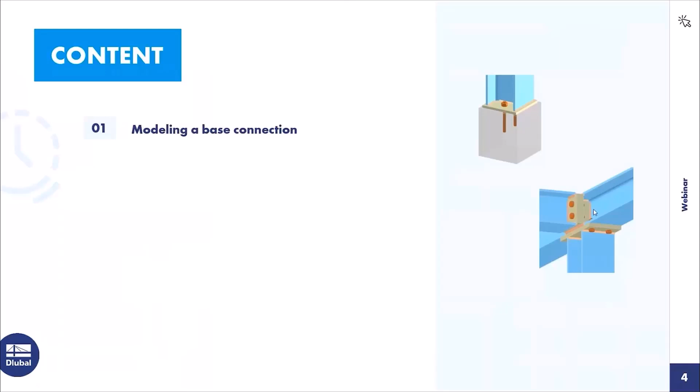For the agenda today, I will model different connections. I start with a base connection, then rigid and pinned connections. Then follows the connection design, and we do a stiffness analysis. The fourth point is result evaluation and documentation, and the fifth point is prospect.

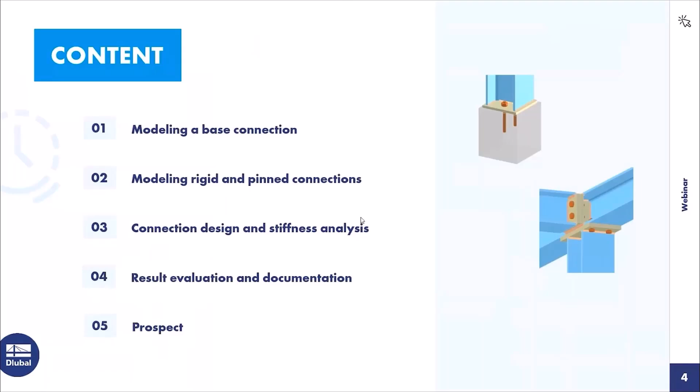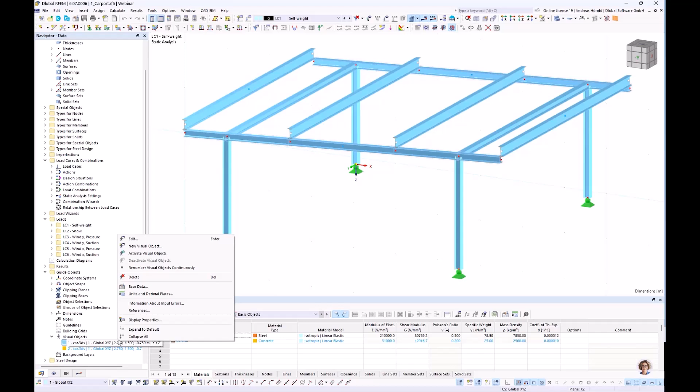Okay, that's the model for today: a larger carport. The dimensions are 6 meters by 7.5 meters. I'll display two guide objects - just a moment - visual objects, I activate them. Two cars so you can estimate the dimensions of the carport. That's the reason why it's made of steel. It's a little bit larger than a normal carport.

Okay, I deactivate the guide objects. So we have different load cases: self-weight load case, snow, wind in all directions. Then there are different load combinations, ultimate limit state, and serviceability limit state design. Also load combinations for the design of lifting up.

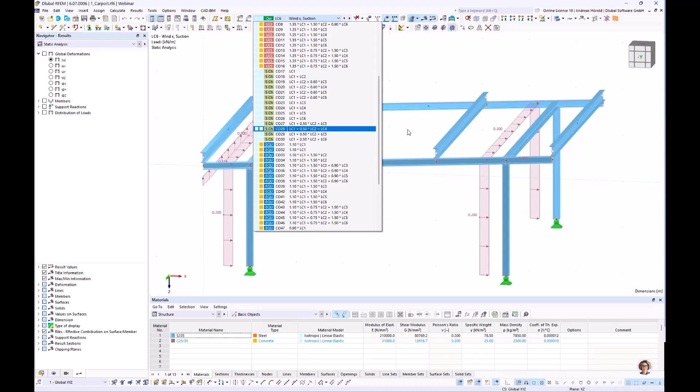So then I did a steel design. Design ratios by members - all designs are fulfilled, with larger and higher design ratios.

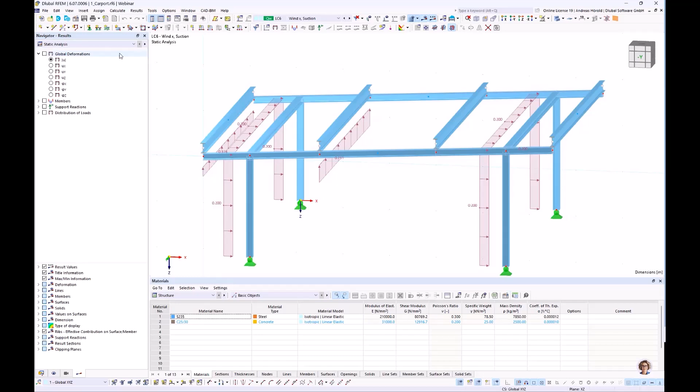Then we activate the steel joints add-on in the base data add-ons. Steel design is already activated, and we activate steel joints so that we can design all the joints of the structure. For standards, we use the Eurocode and the German National Annex for all the load cases, classification, and combination wizards for the steel design and also for steel joints.

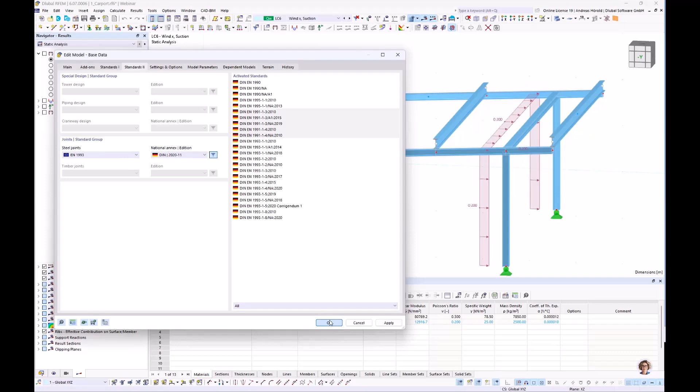So then we start with the first joint. I right click on that node and choose create steel joints. It's only one member. The type is end - now that's clear.

Maybe we turn back to main. Let's check the ultimate configuration - that's default. You can perform a buckling analysis if you have larger plates, such as webs or so. That's quite important. The design check for the plates - the limit plastic strain is 5%, also for the welds. You can change that, but I'll leave it because that's the value from the Eurocode standard. Okay, I'll leave all the other settings.

Then we turn to components, and I can press insert component at beginning or at end - that doesn't matter. But I select this component: base plate. Now we have different modifications: stiffening elements, connection elements, and others, including fasteners. You can move the mouse over the image and see as a tooltip what connection or stiffening element is available. So I select base plate.

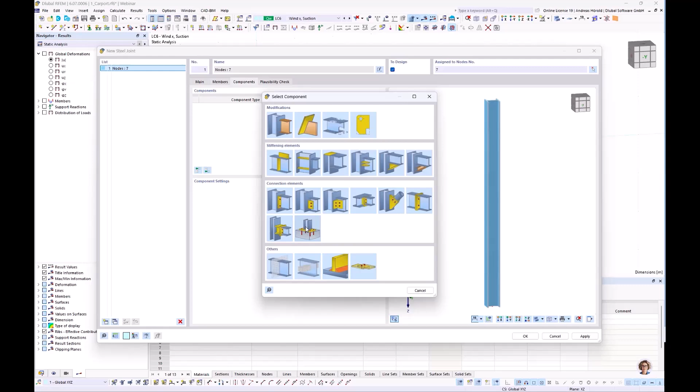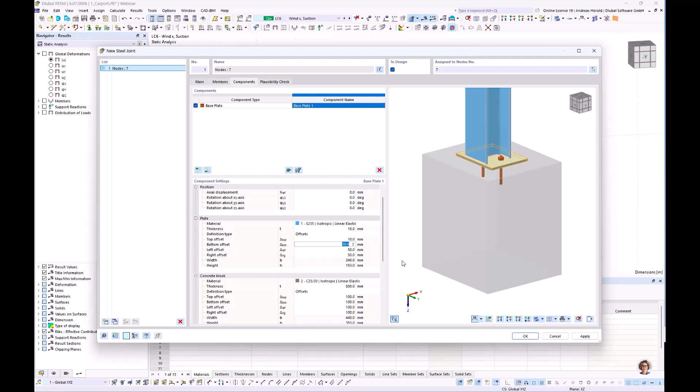That looks already quite good. That's a concrete block - we decrease it a little bit. Let me enter some values. The thickness of the plate should be 10 millimeters. Top offset in all directions is 10 millimeters. To overtake the previous value, you can press F8. F8, F8, F8 - then we have the value on all sides.

So then the thickness of the concrete block should be 200 millimeters, and I define the offset again - also a very small offset of 10 millimeters. I overtake it again with F8.

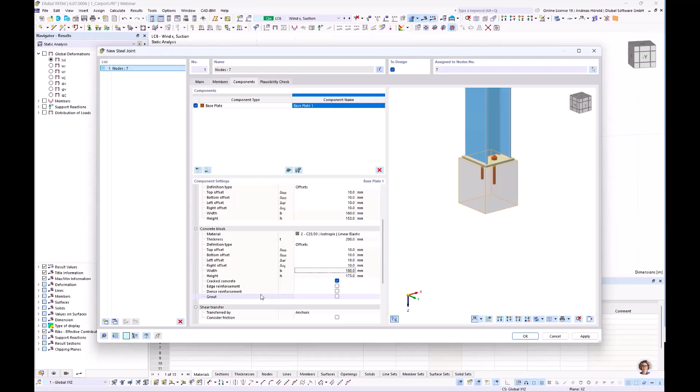So then you can consider cracked concrete - yeah, we do that. You can also consider edge reinforcement, dense reinforcement, grout. You can display that grout - no, we don't use a grout. Then you can consider the shear transfer by anchors, and you can also consider friction if you want.

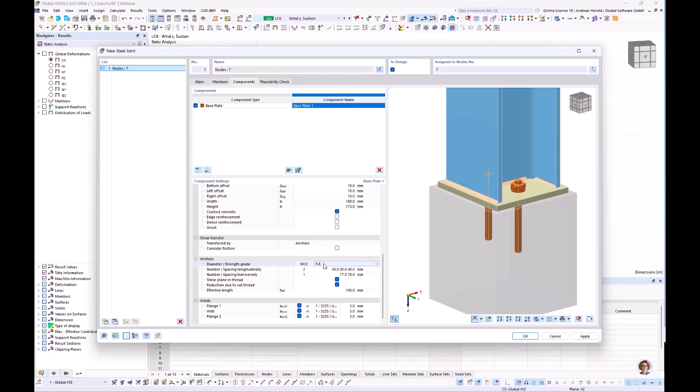So then we turn to the anchors. M12 is okay in our case, and we choose 4.6 for the strength grade. These dimensions are okay, this distances. Then we change that value so it's exactly in the middle. The shear plane shouldn't be in thread, and we consider the reduction due to cut thread. So the height or length of the anchors should be 100 millimeters. That's okay, and the welds are also okay.

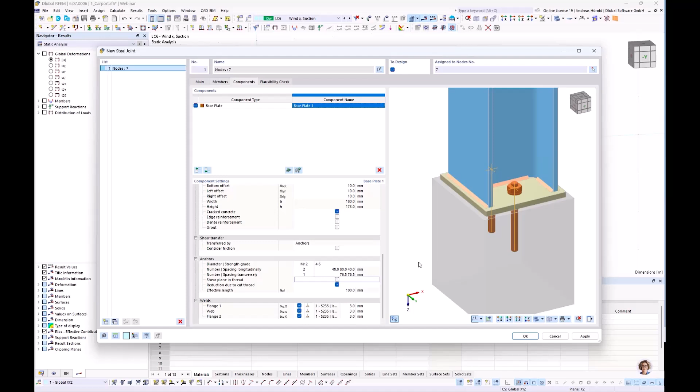Yeah, that was very quick - that's all for this joint. We do the plausibility check - that's okay. We take a look at the model. Now you can see the joint, or the column base joint, here.

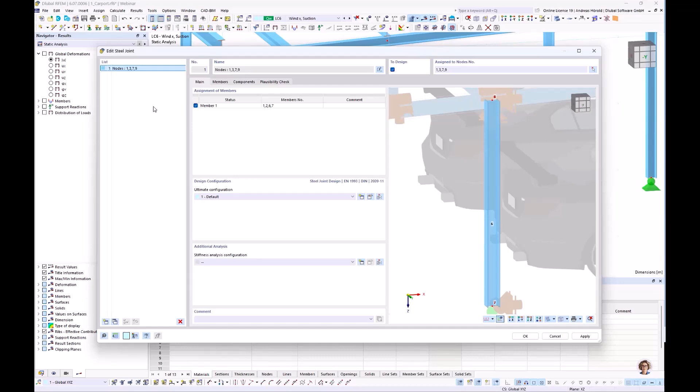You can disable it when you press no joint model, or you can display the simplified joint model right above here. But we would like to display the detailed joint model. So I double click on the steel joint again, and I assign also the other nodes right above - this one, this one, and this one. Now all 4 nodes are selected.

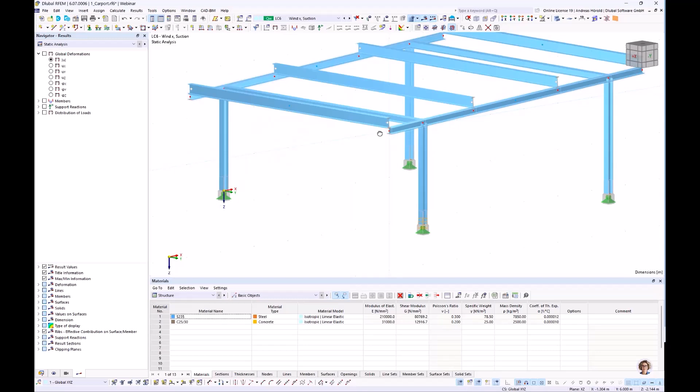So the next joint is the frame corner. We can see in the model the steel model is stiffened in all directions by frame corners - in this direction, also in this direction. There are no bracings. And we would like to define the connections on the frame corner.

So I show you another way to do that. You can see in the navigator data the types for steel joints. One steel joint is already there, and I can do a right click and press new steel joint. But now I have to assign the node.

For members, those 4 members are connected in that node, and we would like to do a stiffness analysis for the frame corner. That's why I select initial stiffness, no interaction.

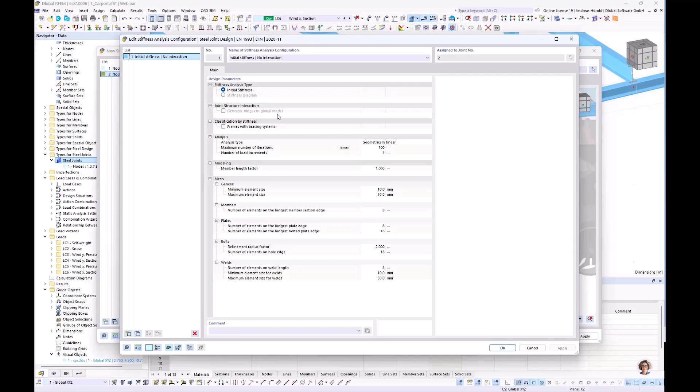Let me go to the settings. Initial stiffness is selected. For the future, there will be another stiffness analysis type available, the stiffness diagram. That's for larger connections with high loadings, where you can consider the plastic behavior. Then in the future you can select generate hinges in global model - that's not yet available, that's why we do that by hand later. Okay, that's all.

So we turn to members. At least one member should be supported. Let's end it - this one is continuous, and automatically member 3 is also continuous selected. So for the column, we would like to do a stiffness analysis.

The program should calculate the stiffness of the joint around Y and around Z - meaning M,Y and M,Z. And for this horizontal beam, there should be also a stiffness analysis M,Y.

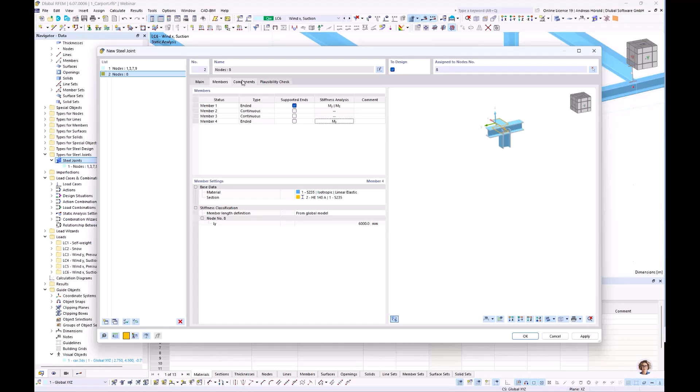So then we turn to components. We insert a component, and this time an end plate. You can move over it - end plate in the middle. So the connected member 1 should be the column. You can see it's selected in the right window with the yellow selection.

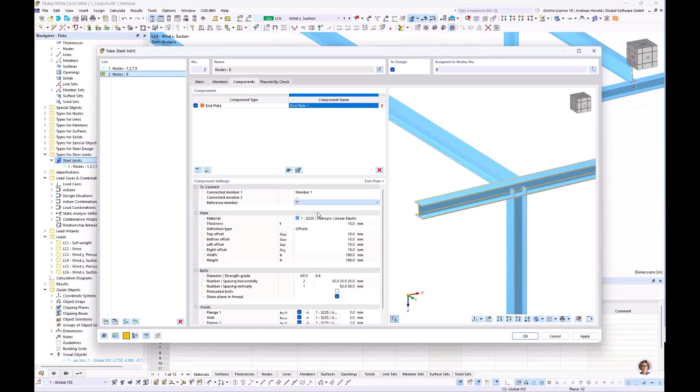And the reference member should be member 2 and member 3. Okay, so you can already see a connection. Now we have to modify it with the next steps.

So the thickness of the plate should be 15 millimeters, the offset in this direction should be 60 millimeters, also in the other direction. And in this direction, there should be no offset.

You can see the changes in the window at any time. So M12 is okay, but we choose 10.9 as strength grade. So that's okay, all those distances, but we select also for the spacing vertically 2, and I select these values, and that looks quite good.

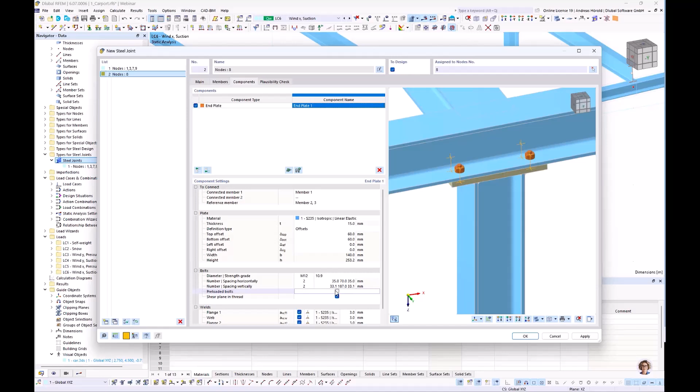We use preloaded bolts for this connection, and the shear plane shouldn't be in thread. And I changed the welds for the flanges to 4. Now you can see at any time what parameter should be defined.

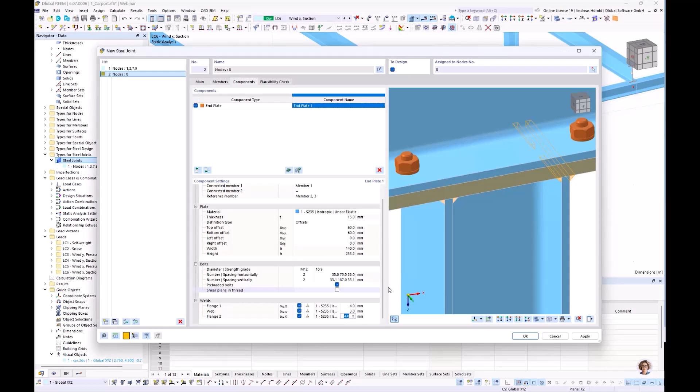So that's all for the connection of the column to the horizontal beam. And now we would like to connect this horizontal beam with this horizontal beam.

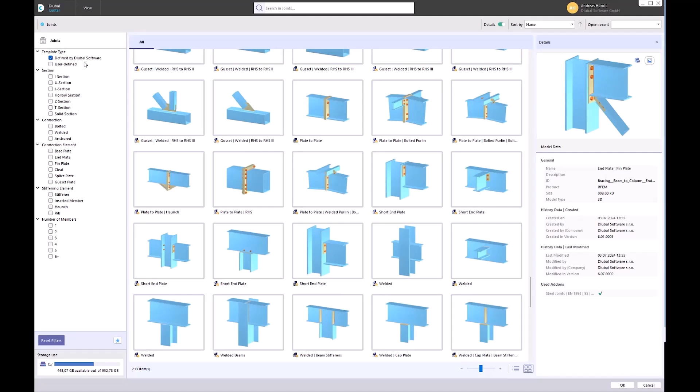That's why we insert a component from the library. So I select that, and what's quite new - the library is in the Dlubal Center. Now you can see different template types, also user-defined from me. So I select only the defined connections or joints by Dlubal Software. We've got the I section.

The connection is bolted, and there are 3 members in the connection. So we would like to select end plate to plate. That looks quite good.

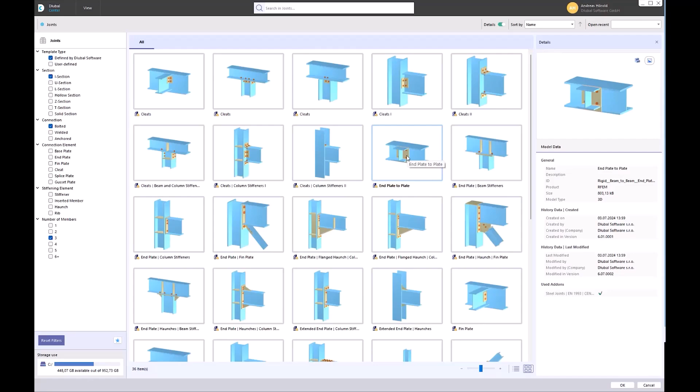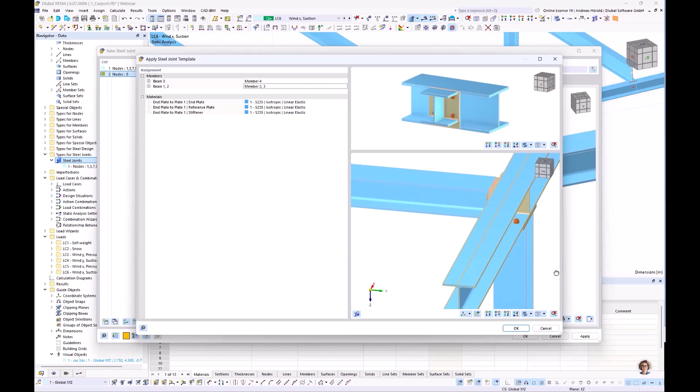So I double click on it. We should see a preview in some seconds. But at first we have to select the member that should be connected - member number 4, this horizontal beam, to member 2 or to members 2 and 3. The preview looks quite good, and we can overtake it with OK.

So let me change the values - also a thickness of 15 millimeters. No, we have to select that line. Thickness of 15 millimeters, okay. Minus 7.5 is okay, so that we can consider a weld here.

Okay, all the values for end plate 1 is okay, but we have to modify the reference plate - 15 millimeters. The top offset and bottom offset is okay, but now I decrease the width so that we have the same dimension as the end plate. So it should be stiffened.

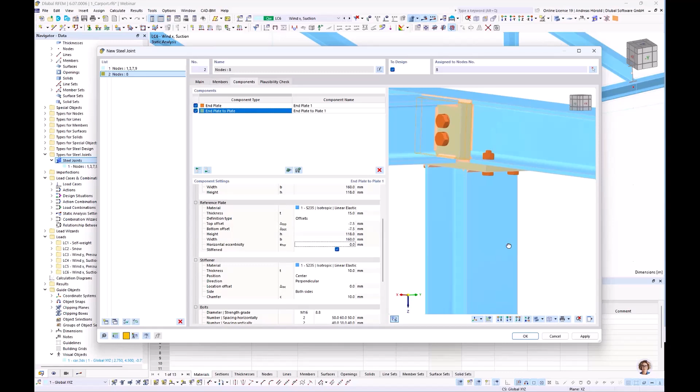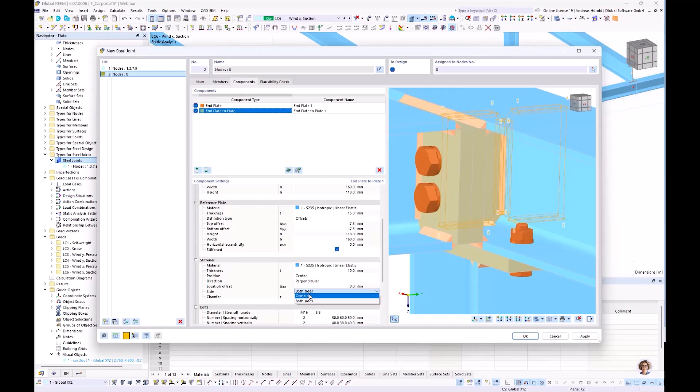Okay, but not on this side, because we would like to define two stiffeners here in the back, but we can't do that because the connection would be closed. So center is okay, but not both sides, only one side. So now this stiffener has disappeared.

Then the diameter should be M12, 10.9 as strength grade. So let me change the spacings.

Preloaded bolts, and the shear plane shouldn't be in thread.

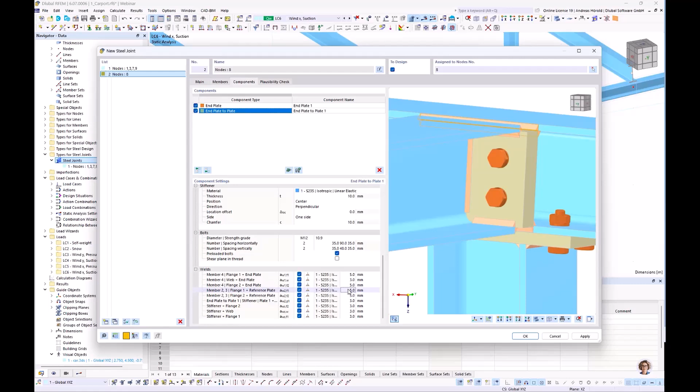The welds are okay, 5 millimeters for the flanges and 3 millimeters for the webs.

So then we have to add the stiffener here. I insert a component at the end. You can see the stiffener here. The stiffened member should be this one, the horizontal beam, and the reference member should be the column.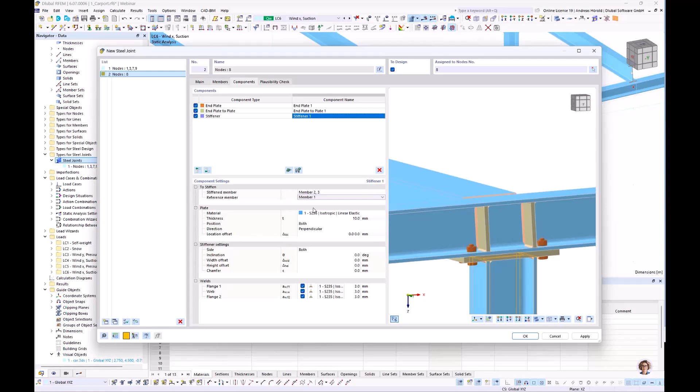So then position is okay. And you can say perpendicular or parallel. Sorry, that was a wrong click. So that looks quite good.

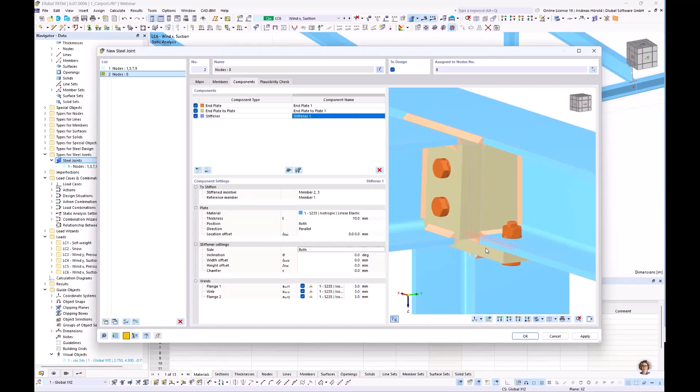But it shouldn't be on both sides. You can see that would be closed here. That's why we select the right side. Then we have only the stiffener on this side.

Okay, so the welds for the stiffener are okay, 3 millimeters. Plausibility check is okay.

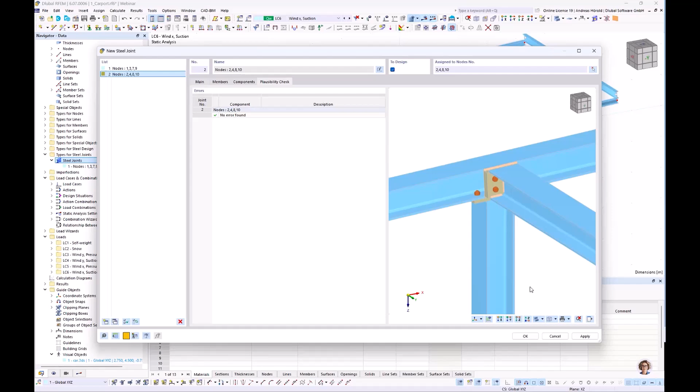I can select also the other frame corners. Plausibility check is okay. And we can display all in the model. Okay, that looks quite good.

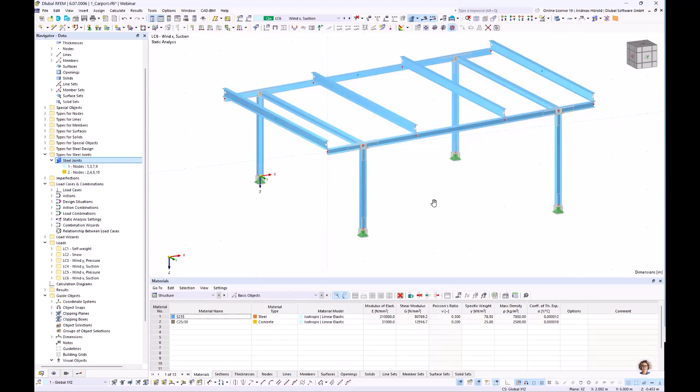Then we add joints for the purlins. I do a right click, create steel joint.

So then members are, those are the 3 members. This one is supported and also continuous. And member 3 is also continuous.

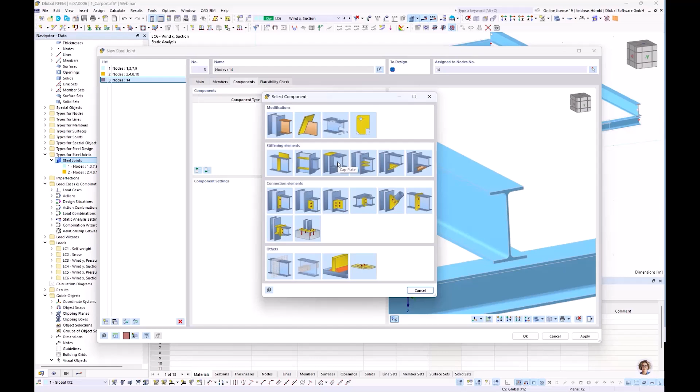So then component. At first we enter a cap plate at the end. Not that we create a gable support, so yeah, beginning or end, that doesn't matter. And you can see the cap plate and the second line in the middle.

So this member is member 2, that's okay. 10 millimeters is also okay, but I define a top and bottom offset of -5 millimeters, so that we can weld that here.

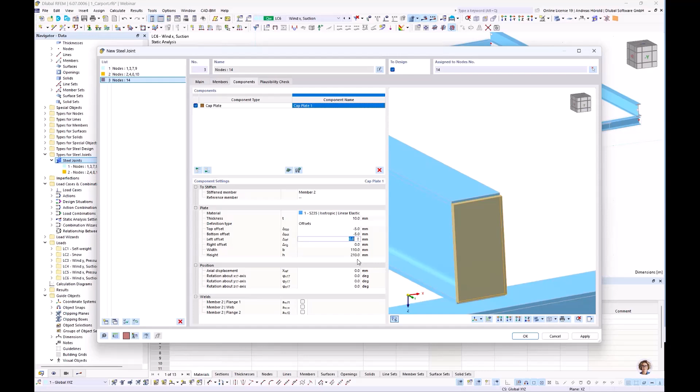That's now in the middle, and we can select or define an axial displacement that we move it to the end. So that looks much better.

So then welds for the flanges and for the web, 3 millimeters. That's okay.

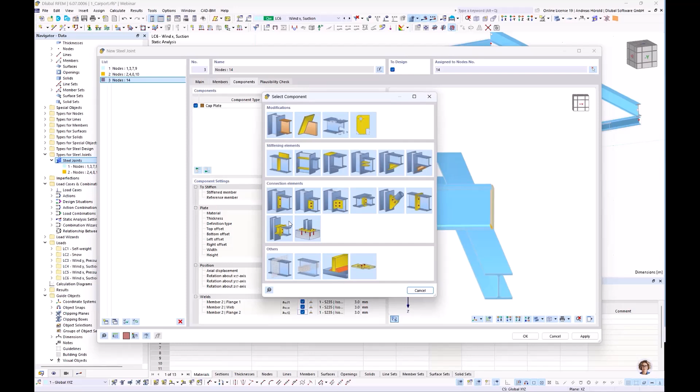So and now we have to add fasteners. We insert component at the end. So and you can see in the line below others, and there are the fasteners.

The component 1 is a plate, a member plate. A plate is, for example, that cap plate or an end plate, and a member plate is a plate of the member, the flange or the web. So that's why we select member plate.

I zoom in a little bit. So and then at first we select member 2, flange 2. You can see it in the preview what is selected. Member 2, flange 1.

Should be connected with member plate and the upper flange. Okay. M12, grade 4.6.

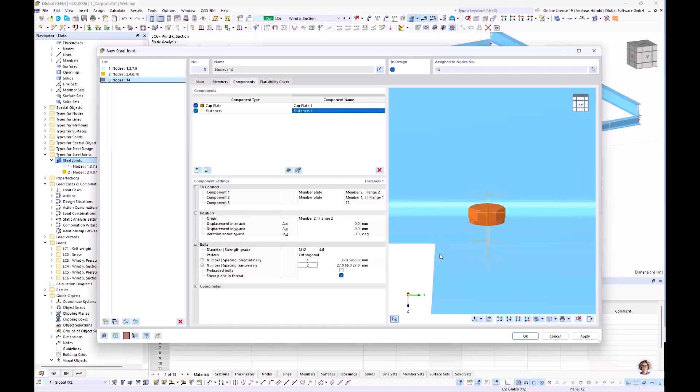Then in this direction only 1, and this direction 2. Yeah, and now it's in the middle of the member. I enter 35 millimeters, and you can see now the bolts are okay. I changed that value to 25 millimeters.

No preloaded bolts, and the shear plane shouldn't be in thread. Okay, that's all for this connection.

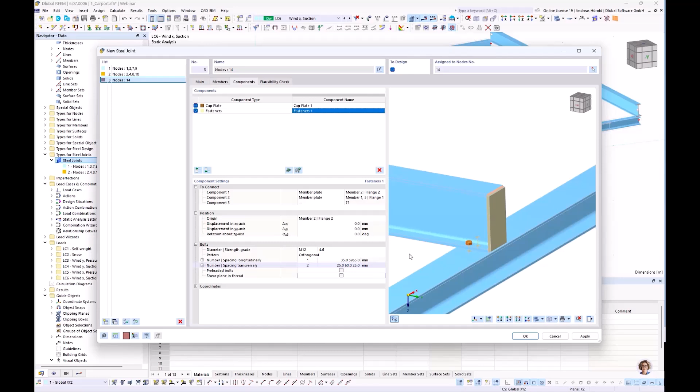Plausibility check is okay. We select the other inner purlins. The connection doesn't fit for the purlins at the edge because of the bolts here. So plausibility check, it's okay.

So and we can take a look at all the connections. That looks good. So now I turn back with double click in this dialog, and now I copy that connection for the outer purlins. So at the bottom on the left side, copy selected joints.

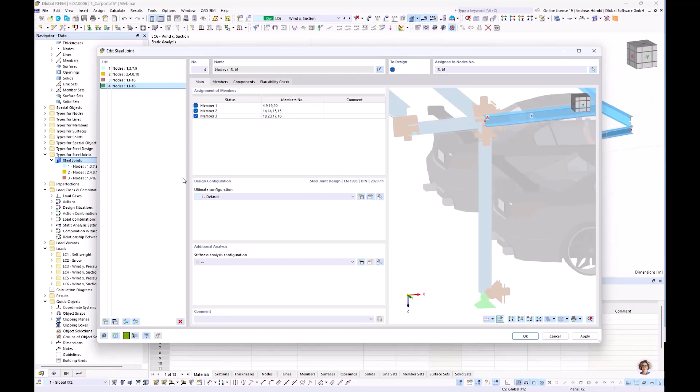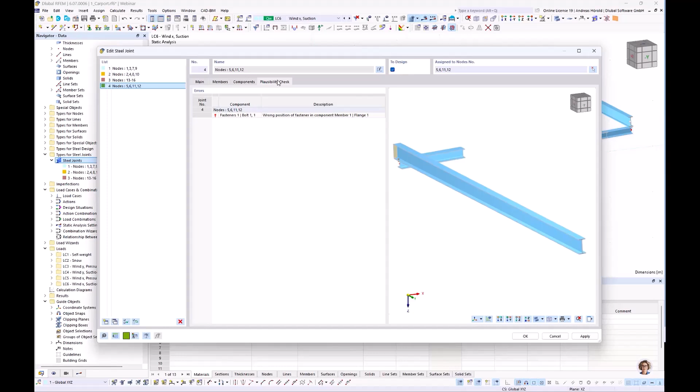So at first I have to select the other nodes. 4 nodes. Okay. And there should be an error message, wrong position of the fastener. That's what I mean.

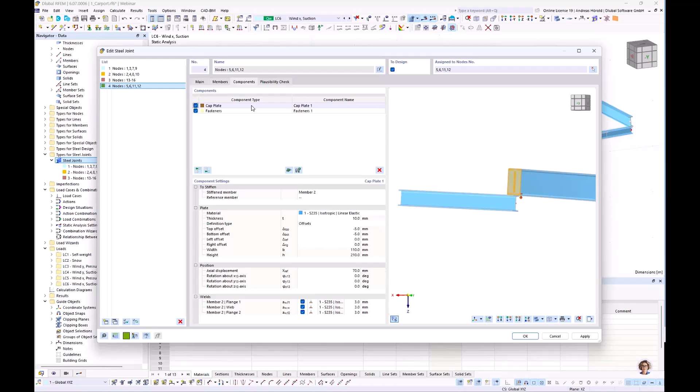Okay, we have to enlarge the horizontal member. So how to do that? We insert a member cut at the end. Left above, member cut. It's also, you can cut a member or you can increase the length of a member.

Member to cut is member number 1 by member number 2. So, and not the closer end, but the farther end. You can see now the length is okay. So now should also the plausibility check be okay. That's all.

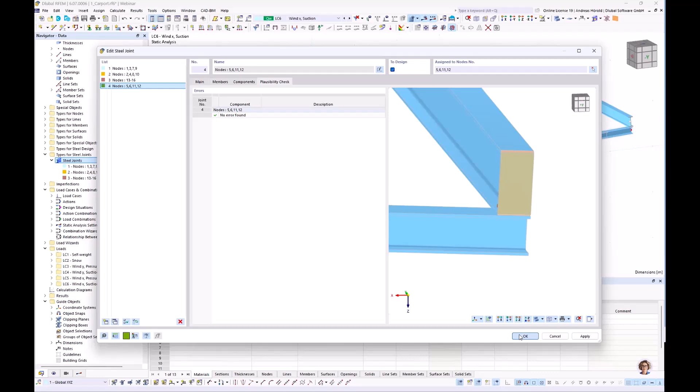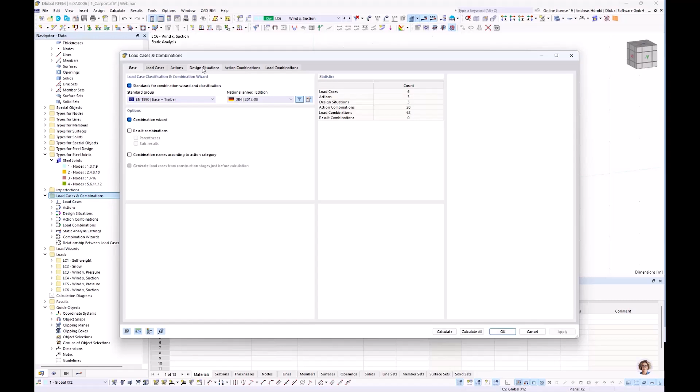Okay, now all connections of the model are created. Let me go to the load case imperfections in the navigator data. Right click, load cases and combinations. And let's move to the design situations.

Ultimate limit state design: the steel design and the steel joints design are activated. That's okay. Serviceability limit state design: only steel design is selected, that's also okay. And for this design situation, EQU, both designs are also activated.

So to skip the calculation time, I turn to an already calculated model. In the table below, we can take a look at the steel joint design. I turn to the table design ratios by joint. And you can see on the right side the design check types.

I overtook the model from the German webinar. There are some German words, but that doesn't matter. Take a look, please, at the design checks: the anchor check, the concrete check for the column base connection, the plate check of the frame corner, the ultimate limit state for the pre-loaded bolts, and the fillet weld check.

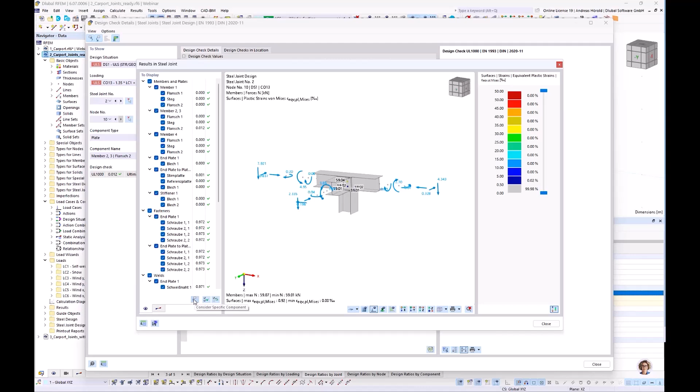Let me check it in the steel joint. You can click left above results in steel joint. So I press that button here, consider specific component, and you can see for this design check what plate is considered. That's the lower flange of the horizontal beam, and you can see a very small area where you can find a plastic strain.

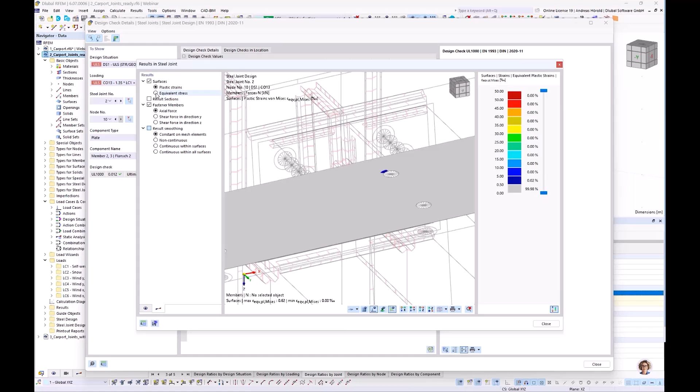But we have, of course, I can show that we have also elastic stresses. I check here equivalent stress, and you can see also the elastic stress, and also only in this area where there is a small plastic stress, and that means also a plastic strain.

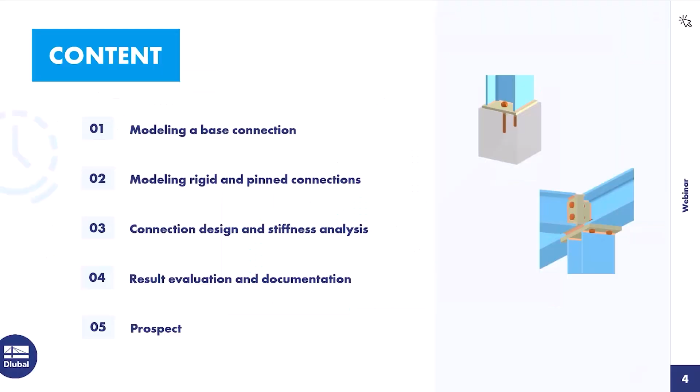That means you can't increase the load with a factor of 5 or so. That's not possible, because that's the area of the plastic strain, and we have already got a plastic stress and plastic strain in the model. And if we increase the load a little bit more, then it would quickly get a higher design ratio. Okay, I turn back to the model.

So let's take a look at the stiffness analysis. Those are the rotational stiffness values for the frame corner. Those are the values from member 1 for the column, and those are the values for this horizontal beam. And we have to overtake those values by hand.

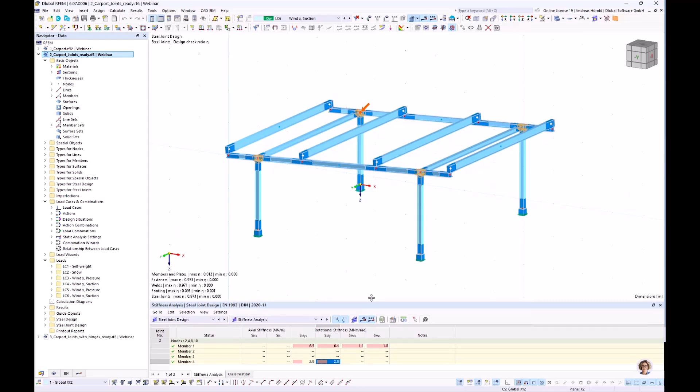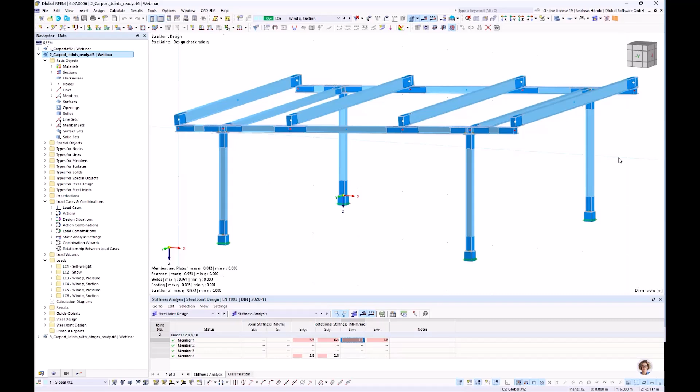So we start with the columns, the column ends. We overtake these two values, so we take here the smaller value. So I double click on the member, I select hinges, and we turn to the dialog hinges, and we need to consider member hinges at the end.

So the rotational spring constant should be... I move that dialog a little bit higher. You can see the rotational stiffness is displayed here in meganewton meter per rad, and I have to enter it here in kilonewton meter per rad. So that's why I have to multiply it by 1000.

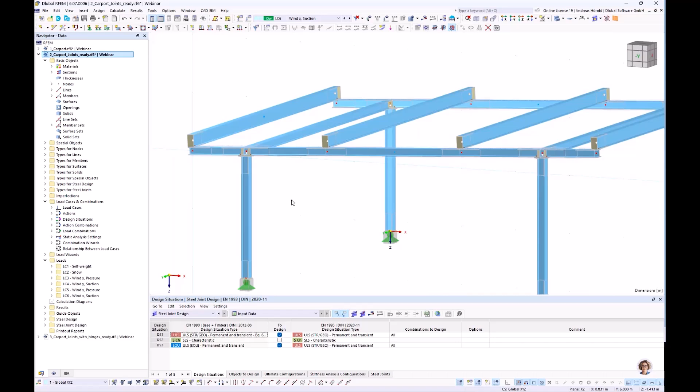6400, and in this direction 1400. Yeah, this value is here, and this value is here. Okay, so at all member ends. So now you can see the hinges here. So the same for the horizontal beams.

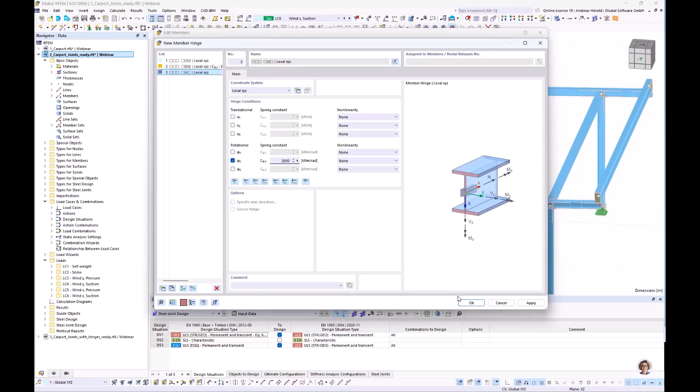Double click, hinges. I turn to hinges and enter hinges for MY: 2800. Okay, the member start and the member end.

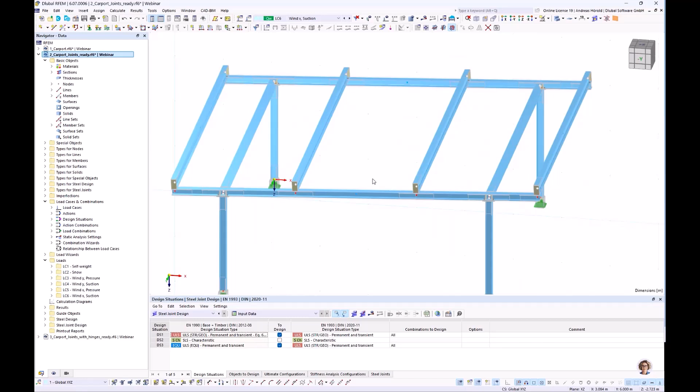Okay, so all member hinges are created, and then we can calculate the model again. I skipped the calculation time and turn to an already calculated model. Let me check the steel joint design. So all design ratios are under 1.

That's okay. I turn to the steel design ratio by members, and you can see the maximum design check is for the serviceability on that point, and that was quite lower in the original model. Let me compare that in the PowerPoint.

The design ratios for the ultimate limit state design are nearly the same as in the original model. Differences of maybe 1 or 2% occurred, but for the serviceability limit state design there are larger differences. You can see that in the PowerPoint.

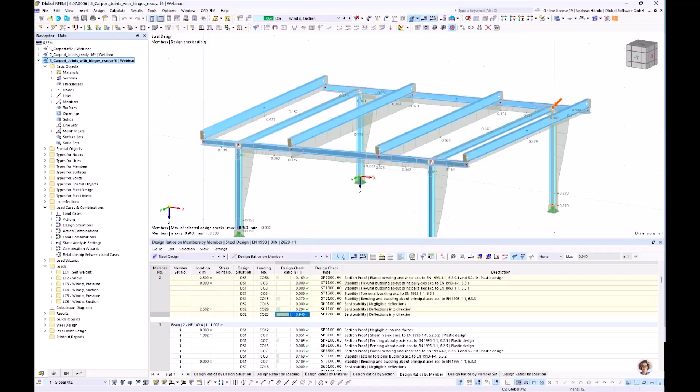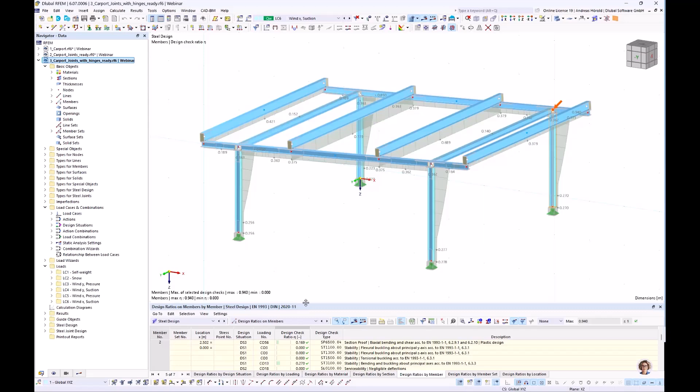Okay, I turn back to the model and we move to the next point for today, the documentation. I would like to print detailed results, for example of one connection, a steel joint design, I used a preloaded bolt check. Let me open the design details, and I would like to print the equations from the standard and the design in the printout report.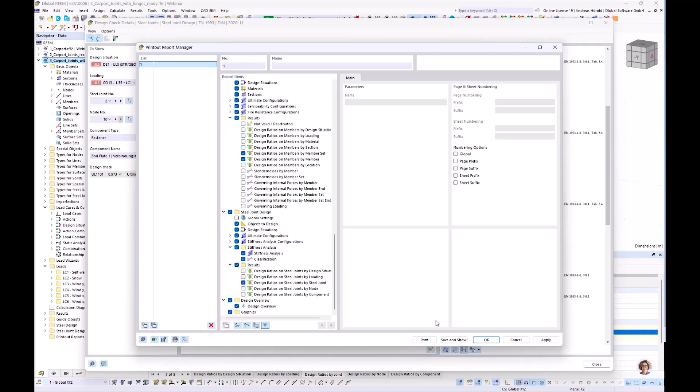So those equations should be displayed in the printout report. That's why I print graphics, or I print it to the printout report. So this is the printout report. I leave the settings, I uncheck the steel design for our webinar. We printed steel joint design ratios, joint by joint. That's quite okay. I press save and show. So the printout report is being created.

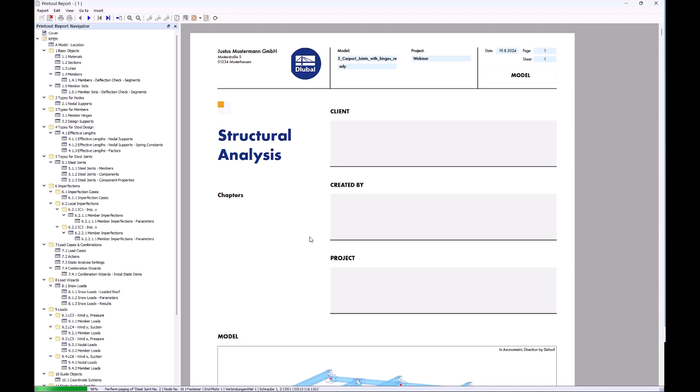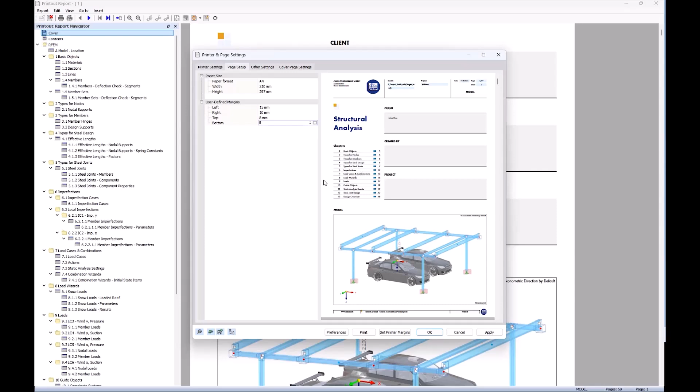General settings are, for example, for the cover I can do a right click, edit. I can enter the client here, John Doe. You can check or display the preview image. Okay, I have increased that value for the printer.

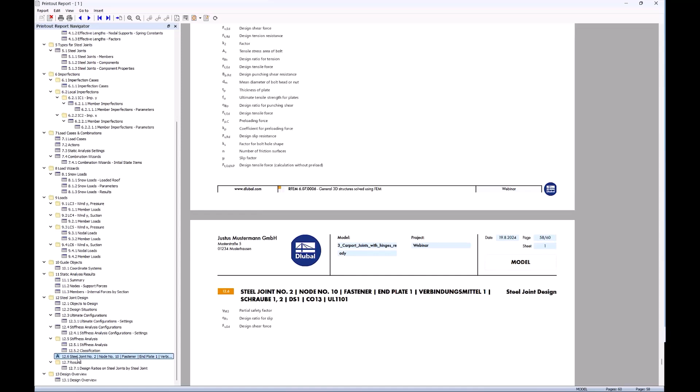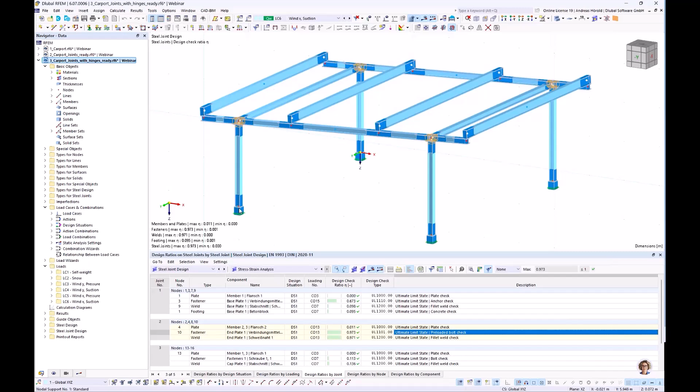Then let me find the equation or the detail check that was printed here. I can also move that to the end of the printout report. I would like to print another graphic as an example. Let me move that to the other screen. So I leave that dialog and double click on the column base joint components.

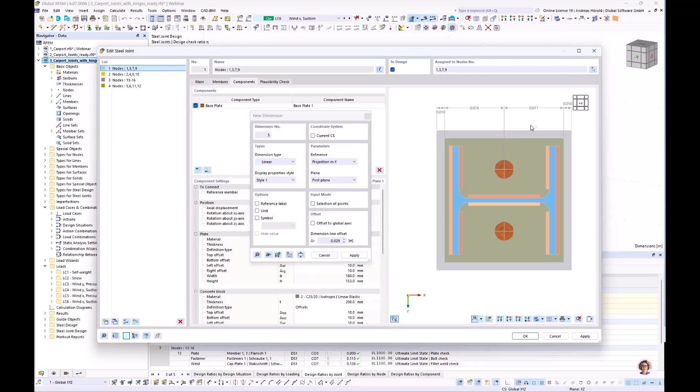I select the view in +Z direction, and with a right click I can add a new dimension. For different dimensions I select linear, so in X direction. I select the corners of the plate, the concrete block, and the bolt. Then in vertical direction the same.

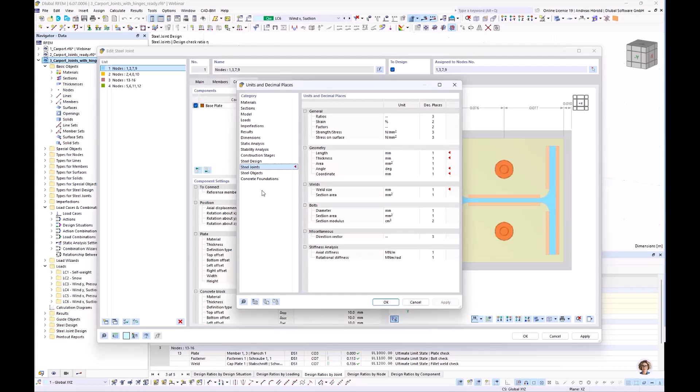Okay, so we can also display the values not in meters but in millimeters. Left at the bottom we can change the units, for the dimensions, from meter to millimeters. Okay, so that looks quite good. I apply that and print it in the printout report.

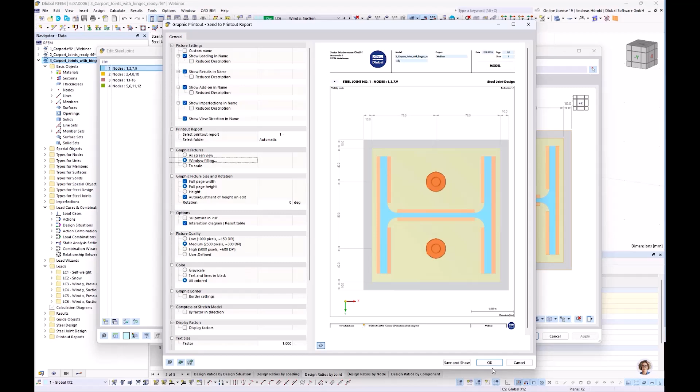So the printout report, okay, then maybe window filling, the rest of the settings are okay. I press OK because the printout report is already open. I move it to that screen again. You can see under types for steel joints, you can see the graphic. I move it also to the end of the printout report.

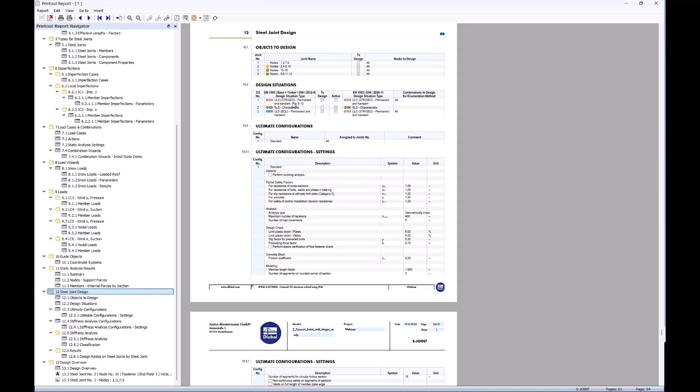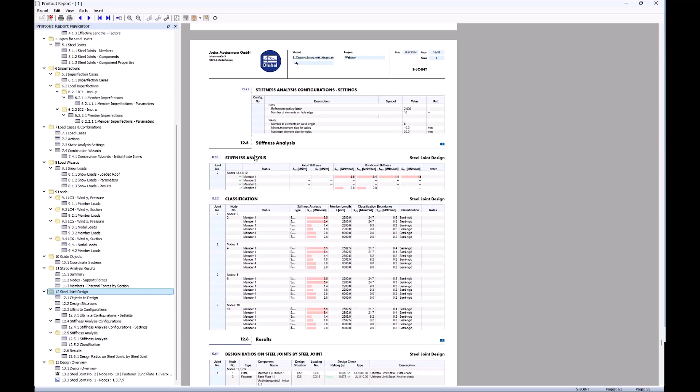Now let me check the steel joint design settings, the objects to design, situations, the settings, then classification, stiffness analysis, and here the design ratios on steel joint by joint. So at the end we have the details of the check and the graphic.

Maybe some general features: you can print the printout report as a PDF or export it to an HTML file. You can translate the printout report, or it would be translated automatically into 11 languages.

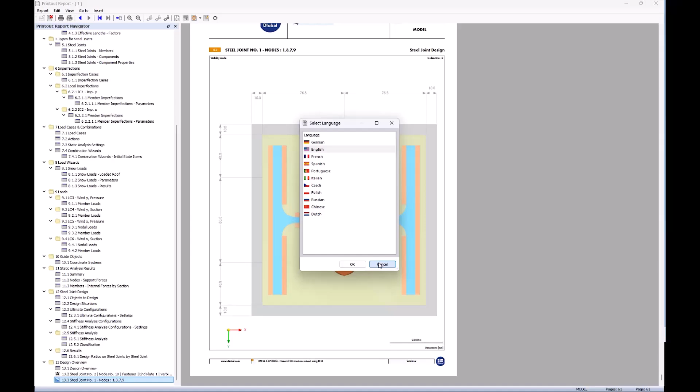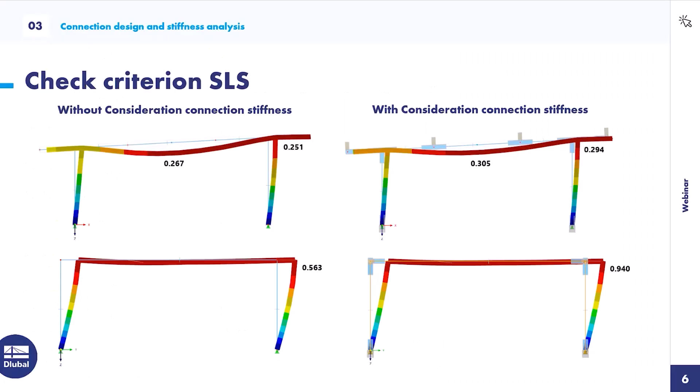Okay, that should be all for the documentation. Let me turn to the last point of the webinar. I turn back to the PowerPoint slide. Those are the planned features.

We have released the component surface contact, and we will also release the line contact, that's a stiffening pressure contact. We plan to release the joint structure interaction, that's an automatic generation of the hinges with the associated spring stiffnesses, which we did manually in this webinar. I also mentioned the new stiffness analysis stiffness diagram, with consideration of nonlinear stiffnesses under larger loads.

Then design of connections with result beams will be available. Then creation of concrete block and component fasteners - just imagine you would like to connect the flange to a concrete wall, that would be possible. And the last planned feature mentioned today is connections with massive cross sections, e.g. round steel.